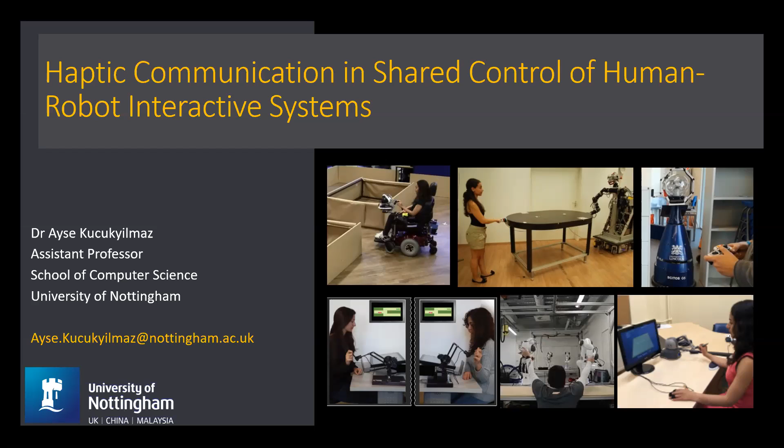Thank you, Mario. It's very nice to join this seminar series. So as Mario has introduced me, my name is Ayse Kucukyilmaz. It's a very hard surname. And as he has introduced, I'm an assistant professor in the School of Computer Science at the University of Nottingham. Today I am going to talk to you about a general overview of my research enabling haptic shared control systems while interfacing humans and robots. I will start my talk with a little introduction of myself.

So I started my robotics journey in 2007 when I was a PhD student at Koç University. By then I was mainly working with haptic interfaces, which are these small robotic arms which allow you to feel forces that you can render on a typically virtual scene. We were actually working on mostly simulated worlds, virtual worlds, and looking at how humans can interact with computer agents.

In 2010, I visited the Technical University of Munich, and that was my first interaction with real robots, where we integrated mechanisms that we implemented for human-computer interaction on a real man-sized mobile robot. The idea that we had during my PhD and at the Technical University of Munich was focused on the role distributions between two agents.

So how should a robotic agent assist a person, not by only acting like a follower, but acting more like a proactive entity that is like a peer to the human. During these studies, we focused on understanding how we allocate these roles dynamically, how the human and the robot should exchange their control over the task, by introducing haptic negotiation mechanisms, which look at the forces that are applied on a task and how they can be used to change the dominance behaviors of agents.

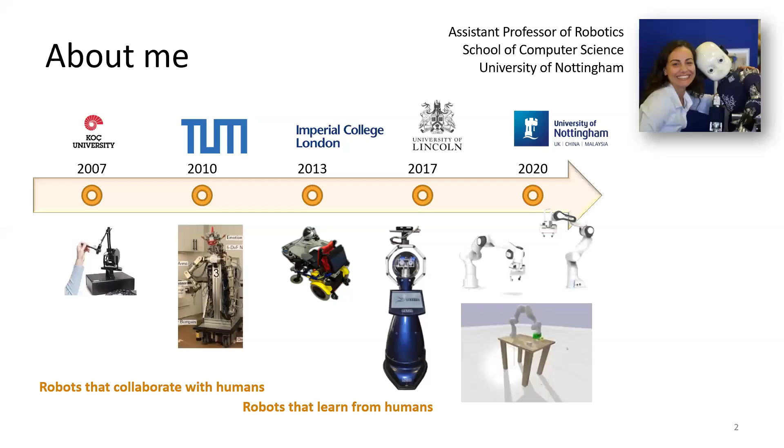So during my journey and my research, I have been initially working with robots that are only collaborating with humans, and then I moved to more learning methodologies. I'm currently also focusing on robots that learn from humans, and the ultimate aim of my research is to enable robots to complement humans.

So this can be a short summary of all my research interests. Unlike many people in the robotics domain, I don't really try to make these robots fully autonomous, but I try to make them work better with us.

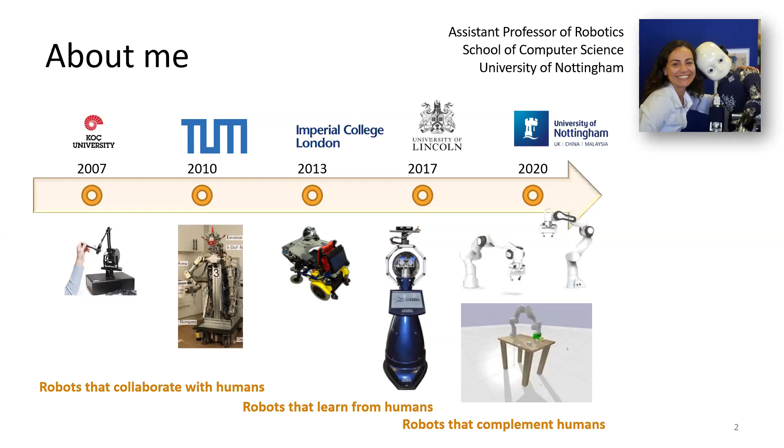So I try to find ways to get the best of both worlds, get the powers of the human and the robot together to come up with better symbiotic structures. As I say, the topics of my research can be summarized within using these keywords maybe.

I work on adaptive haptic shared control. I try to come up with systems that implement shared control, and what this means I will explain in a moment. I tend to rely on the haptic modality, which is about the sense of touch, or more about the forces that we use while interacting within physical interaction. So I build haptic guidance mechanisms, I build dynamic role allocation mechanisms, and in doing so, I make use of machine learning and look at how we can learn skills from the human, or how we can understand interaction states while two agents, humans or robots, are interacting together.

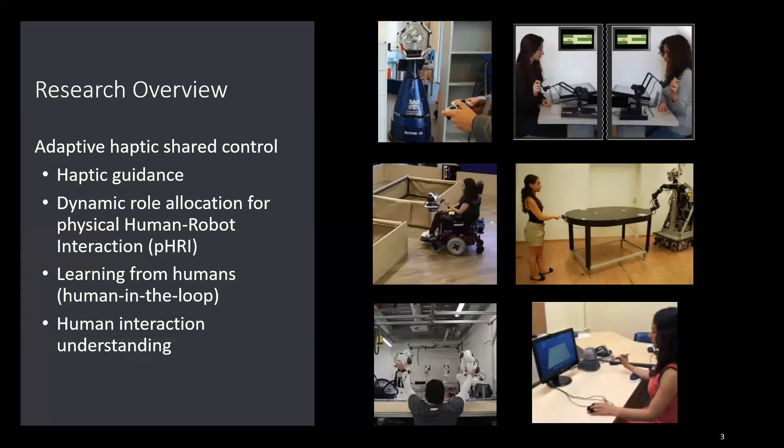And as you know, many robotics talks, I think, start very similarly. I will do the same, and I will talk about a contrast between the industrial robots and the robots that we have at the moment.

In the industrial domain, in more old-fashioned robotics if I may say, the purpose of robotics is typically automation. So we create robots to give them boring or repetitive jobs that people don't want to do, or we give them some jobs that are not really safe for the humans, so that we eliminate these risky or dangerous situations. And typically the industrial robots, or any robot that you see in a hazardous environment, are very big. They are really very strong and big robots that can work at very high speeds, but they are designed to work in typically isolation from humans.

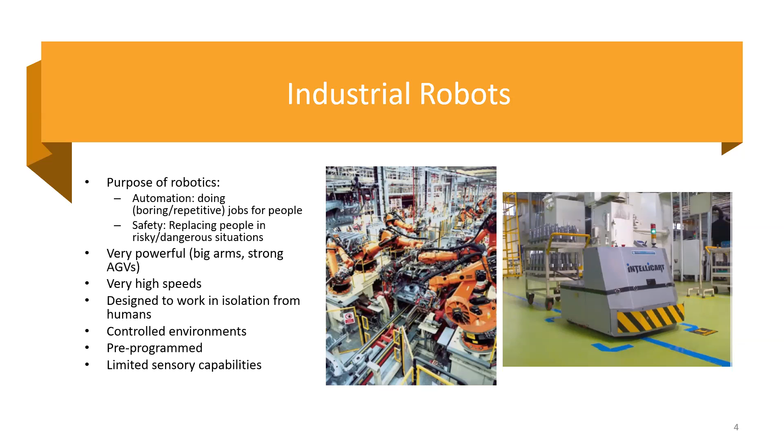So you wouldn't typically see a human hanging around and changing the environment, and you don't really see the environment changing too much. So everything that the robot does is pretty much hard-coded. And because nothing really changes, that hard coding doesn't really cause any problems while the robot is performing its task. And because of this, you don't really need to have very complex sensory capabilities, unlike as we have it with the robots that we have in more futuristic scenarios.

So today's robots, I want to maybe imagine a little bit with you, are designed, or we try to design them to work along with people. Because when developing today's robots, we try to come up with these robots that can maybe physically collaborate with humans, and this can be maybe autonomous cars which can work with you to improve your driving, so that you don't really get into a crash, or you don't actually have to get tired while driving.

Or it can be more like cobots or mobile manipulators which can carry stuff with you. They can be even those robots which could enable you to go to a museum while you're under lockdown, so that you can get onto remotely on the robot and go around the museum while driving around with other robots maybe, or other people.

And physical rehabilitation or assistive robotics is another area that today's robots focus on, so that we physically bond the robot onto a human. So there is a very, very strong coupling with the human and the robot. And there are these robots which enable social interaction, such as social assistive robotics or robotics for mental health. And these kinds of robots are probably harder to implement, because they do need to interact effectively with the humans.

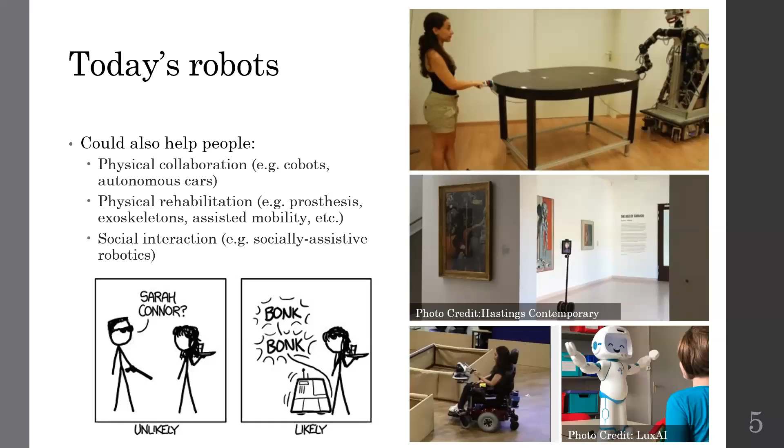And from this discussion, I want to actually tell you my opinion, or some group of people's opinion, about full autonomy. So when we think about these robots who have their autonomy and who can complete these tasks, some researchers actually think that achieving that full autonomy in unconstrained environments is not anything more than a myth. Because if you have ever worked with robots, or if you have tried to implement robots in a slightly realistic scenario even, you can see that it is really very hard to get them operate under full autonomy successfully. And in such cases, you still rely on human intervention or human decision-making capabilities.

For example, if you're in a situation where you have a robot to sort maybe dangerous materials in a nuclear reactor, you could want a human to point to you what should be placed where, or what is dangerous and what is not. These kinds of decisions are actually very hard for robots to do, whereas it's easier for us. However, robots are much more precise and faster. So they have their strengths and we have our strengths.

This is the core of all my research. Thinking about this, I want to discuss the concept of levels of autonomy. This is more prominent with the coming of autonomous cars, where they've defined 5 different levels of autonomy, ranging from teleoperation to full autonomy. This spectrum of levels of autonomy is actually consistent across all robotic applications.

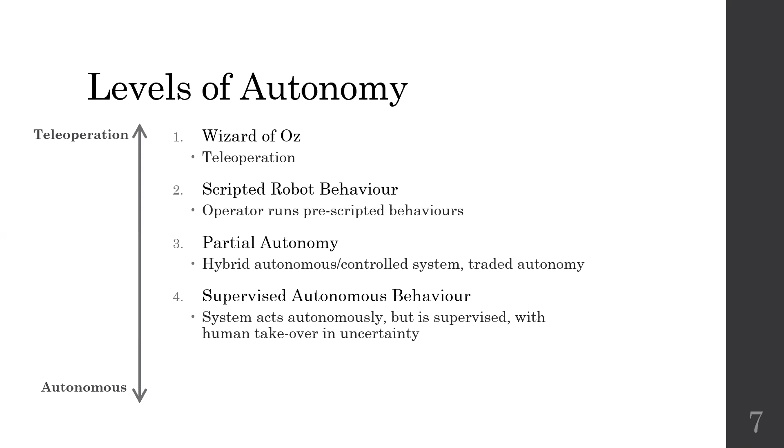Then there is supervised autonomy, similar to partial autonomy, but here you tend to go toward a more fully autonomous robot, where the system can act autonomously most of the time, but there's a supervisor. In case of dangerous situations or decision points, humans can still take over control of the task. And obviously there is full autonomy at the end of the spectrum, where the robot does not need any human intervention and can operate fully without humans, which is typically the myth I'm talking about.

In between teleoperation and autonomous operation, there are all kinds of behaviors which I'll call human in the loop, because in all of them you have a person somehow interacting with the system. In all these scenarios, what you see is this turn-taking between the human and the robot: the human tells the robot to do something and the robot performs something. This is one way to implement human in the loop.

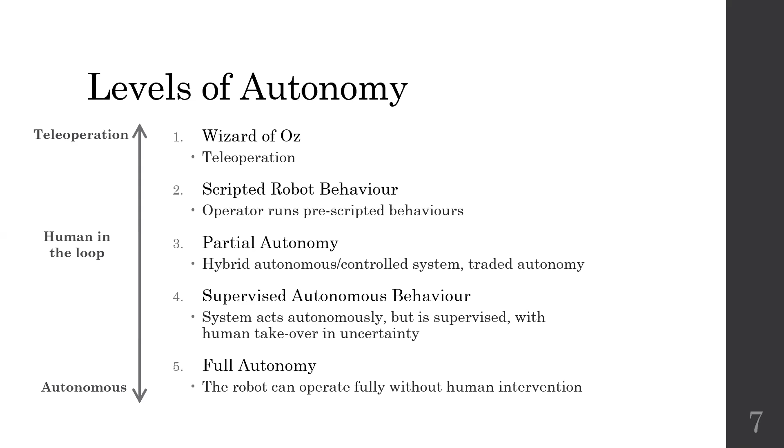We need human in the loop because automation is by definition problematic, and it has been discussed for decades. For example, Bainbridge has indicated that as tasks get more complex, as long as you demand more complex control behaviors from a robot, the more you need help from a human operator.

In Norman's problem of automation, feedback, and interaction, what he states is that you need to implement appropriate interactive systems by always assuming the existence of errors, by enabling some kind of continual feedback, and continually interacting with operators in an effective manner. And probably a quote from Murphy should be included here, saying: if you anticipate something bad to happen, it will happen when you're working with humans.

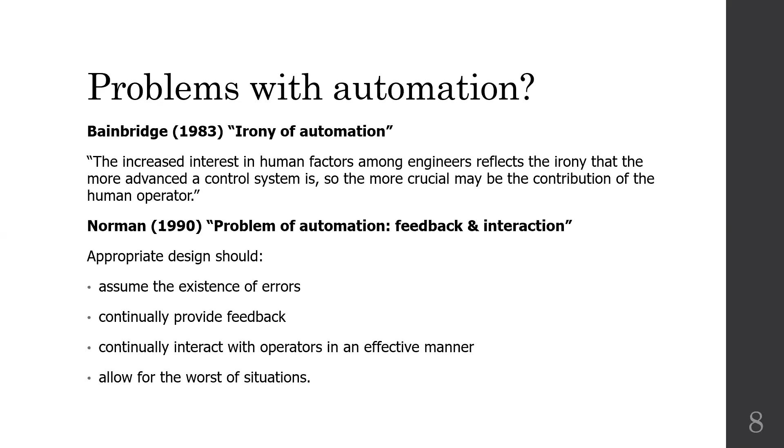These scenarios are typically very complex because the environment gets complex, because task definitions change, and so on. Because you can't really program autonomous behaviors for such things, you start putting a human in the loop, and that introduces extra problems. Because we have human errors - the human involved in the task could be the designer, so the autonomy itself can be problematic, or it can be the operator who's manipulating the robotic system to support it.

Maybe the decision making contains errors. Something else lacking in this framework is feedback. You have to provide feedback from the robotic system to the human in a continuous way, one that does not annoy the human or cause overload. In order to enable this, we need a system that is adaptive and compliant, instead of a rigid, completely formal, autonomous mechanism.

The current solution to human in the loop, using the human as an emergency system that needs to be aware of system state, failures, or capabilities at all times, is very demanding for the human. If the human has sole authority of switching the control authority, that is problematic, because the human needs to be alert at all times. In case of dangerous tasks where the human does not perceive the situation, the results could be catastrophic.

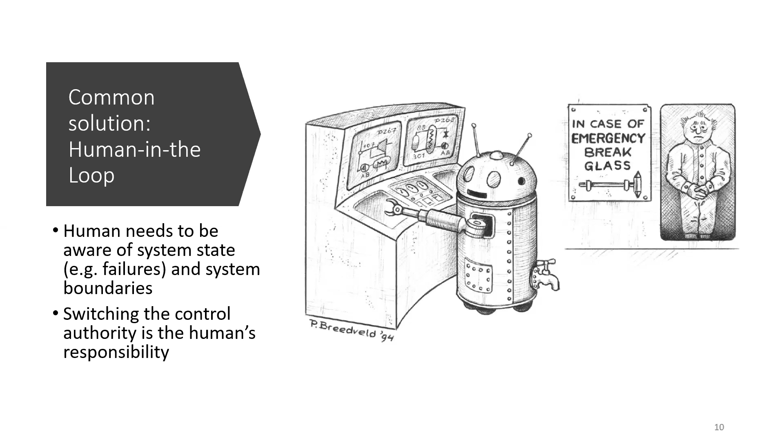I want to give an example of a traded control scenario we have implemented to show you a typical human in the loop scenario.

In these two videos, you see our robot Linda working in our lab. We used ROS move base to implement autonomous behavior for the robot. Anyone who has worked with mobile robots has possibly encountered similar situations, where you design an environment, change something slightly or set some navigation parameters, and it doesn't work correctly in all situations. Here we show two situations: first, Linda gets stuck in a corridor even though it can actually pass through it. Second, there is a node overlapping with an obstacle in the topological map, so it can't find the correct route. These situations are actually very simple for a human to solve.

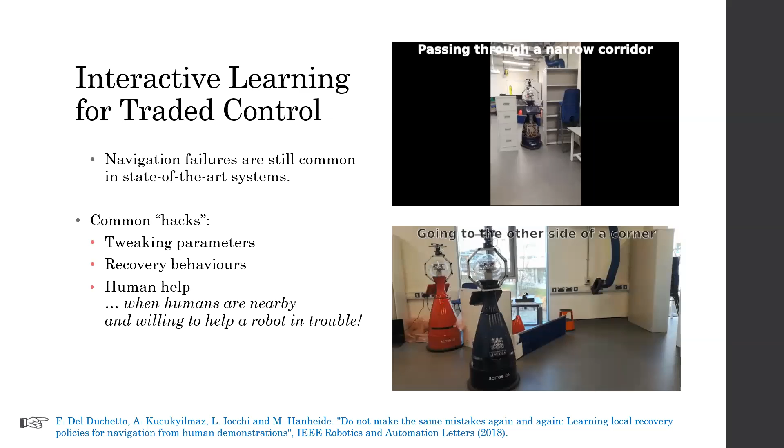Here we implement a traded control mechanism, so we have global autonomous navigation control of the robot, and we enable a human to step in. In case the robot fails, and can understand that it fails, the human could show some routes for the robot to recover from the error situation.

What we implemented is a two-layer learning framework with a failure classifier. We implemented a Gaussian process classifier to look at the laser scans of the robot, and the robot classifies the error in a certain situation, then asks the human to show it how to recover from that problem.

These recoveries are also implemented as Gaussian processes. We execute a recovery trajectory, model it using Gaussian processes, and feed it into the robot's library as a local navigation strategy, so the robot knows that in case of this kind of failure, it could step in and use that local strategy to get out of it.

This is what we came up with in the end. The robot is moved by MoveBase, and it faces a failure, and the human steps in, and the human basically shows this is a safe thing, so you can just move on, and the robot learns it.

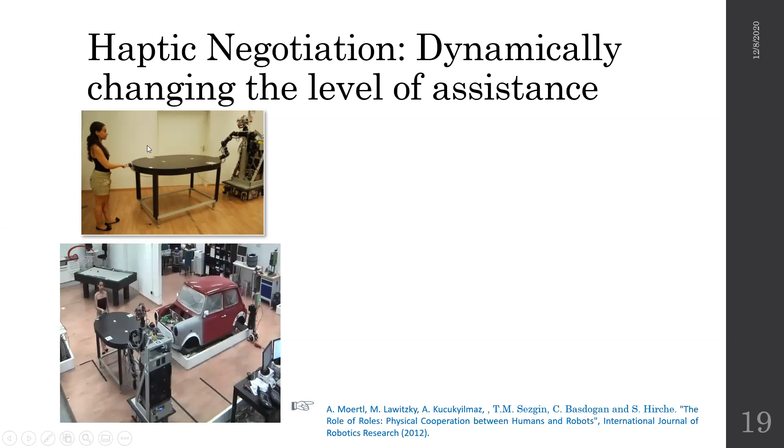In here, the robot is haptically linked to the human. There is a force sensor where the robot can actually read the forces applied to the table by the human. What we had implemented here was a really symbiotic relationship — we assumed that each agent is actually a peer, so each agent has the inverse model of the table and this impedance control in the models.

Using those models, each agent can come up with certain wrenches that should be applied on the table to move it, which consists of the plan of the agent. These are then negotiated through a dynamic role behavior to assign control levels, autonomy levels, to the human and the robot to collaboratively move this table.

We did this by integrating a role behavior negotiation block into the control scheme, so that we look at the forces applied by the human and the robot, create this role allocation setting, and assign autonomy to the human and the robot appropriately so they work more effectively. What these 2 studies showed us was that in both studies, this dynamic role allocation behavior was shown to improve task performance and reduce effort requirements of the humans.

We showed that the use of haptics, the use of these forces, can on its own allow the robot to infer the intent of the human, so you don't need to look at the motion or have cameras to understand the intentions. By only looking at the forces, you can try to understand the motion intentions of the human, and using that information the robot can change its behavior and adapt better to the needs of the human.

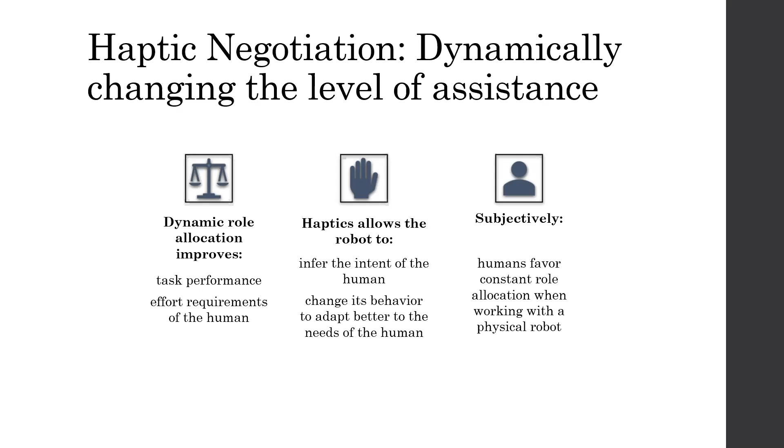However, especially in the real robot experiment, what we observed was humans still favored constant role allocation because this very proactive behavior felt very intimidating to them. That hints at some further research into this, to study what is the best way to interact with the human, and how the robot can make it clear that the decisions or actions are actually for the benefit of the human.

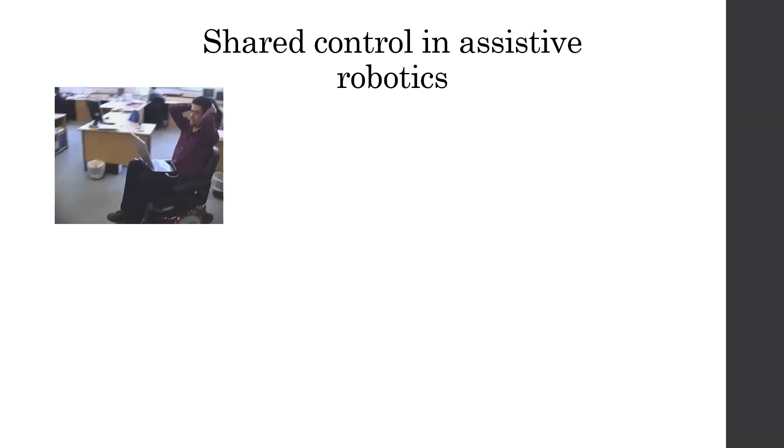On a very similar thread, I have worked in assistive robotics, and the shared control idea applied to assistive robotics is interesting because you tend to move toward building more personalized systems. These videos illustrate the assistive robotics application. We were working on this wheelchair, and here Tom, who's in UCL right now, is demonstrating a fully autonomous robot, which from an engineering perspective we thought was a very nice solution.

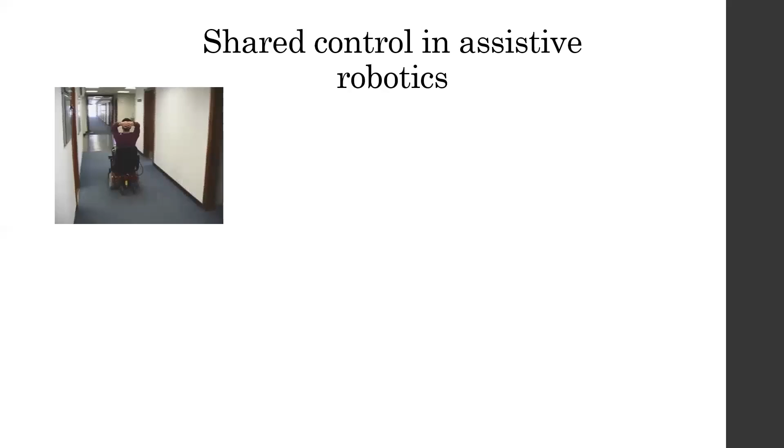However, the real users actually hated this solution, because especially wheelchair users really want to be in control. They don't want to be carried around.

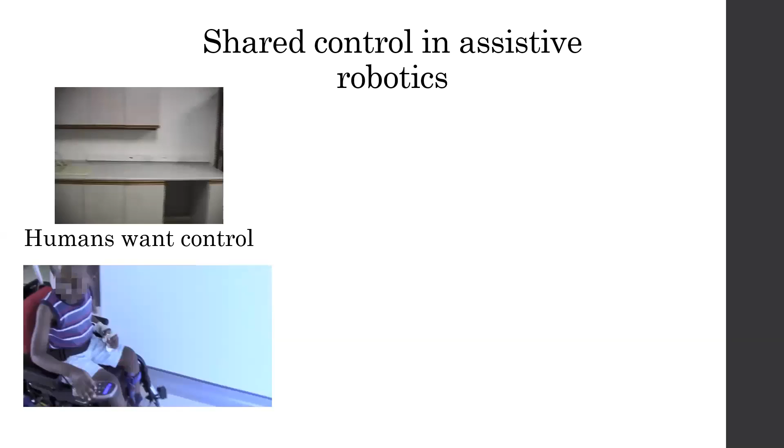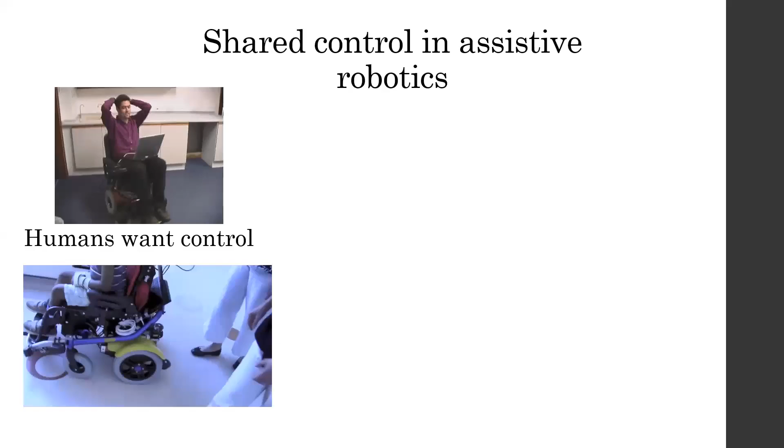On the other end of the wheelchair user spectrum, we have different kinds of users. For example, this child had a surgery, and because of the surgery he had lost his sense of fear. The NHS wouldn't give him a robotic wheelchair because he was dangerous to the environment, to himself, and so on. As a very small child, because he couldn't really move on his own, his option to cognitively develop was very, very limited.

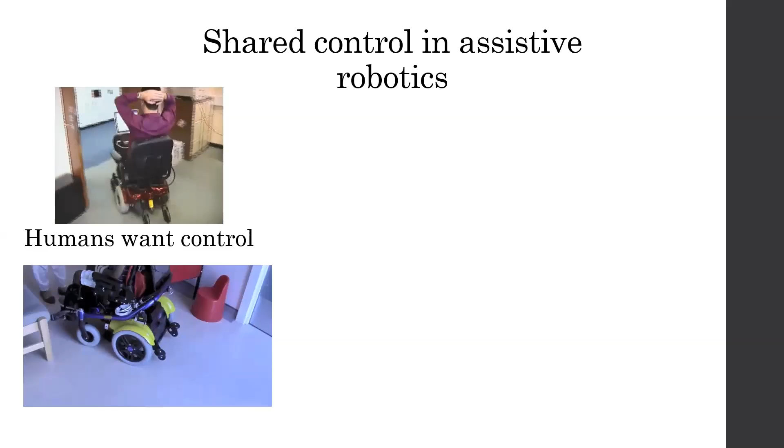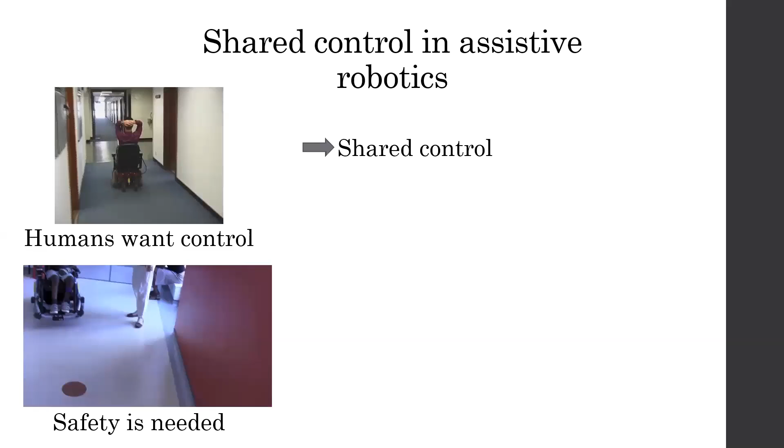In such a user scenario, what you should actually ensure is safety. This kind of different personality, different personal choice or personal need, is an open invitation for building shared control systems. The system we developed here is again a haptic shared control system, a prototype system, obviously not to be given to this child.

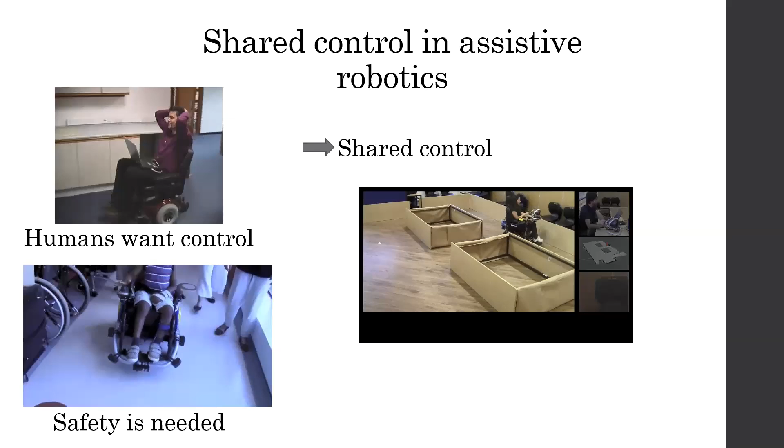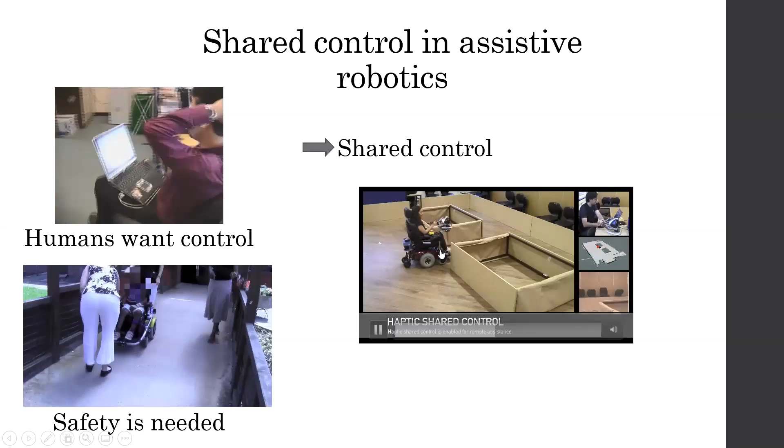What we have here is we can allow a person, or an autonomous agent, to move the wheelchair, but we can also make the human at all times capable of controlling or taking over control of the wheelchair. Initially, what you see is the robot controlled by a remote teleoperator. However, if I feel threatened, or if I feel the autonomy or the remote operator is not doing something correctly, I can hold the joystick and stop or move the wheelchair the way that I want to.

What we have implemented here is actually another regression problem. We found that a learning from demonstration approach to teach a robot good assistance policies was a nice approach in this wheelchair scenario. So what we did was we haptically linked two agents.

In a demonstration trial, the remote human is actually looking at how the human is driving around, and depending on what the human is doing — for example, he was correcting the motion here because I was driving very close to the obstacle — he's providing some assistance. After this demonstration is taken, we look at some data from the human, from the user, from the environment, from the robot, and we train a Gaussian process regression model to learn the corresponding assistance commands.

When the remote teleoperator is gone, when I'm alone and driving, the assistance is always on, and what it does is it tries to mimic what this remote operator is doing. Here there are two lines: one is my commands, and the yellow-green one is the assistance commands. It's clearly shown that the assistance is trying to turn around these corners a little bit faster than me, so that I don't get very close to hitting any of the corners. What we also showed here is the system was actually learning and really mimicking the behavior of the robot, of the remote person.

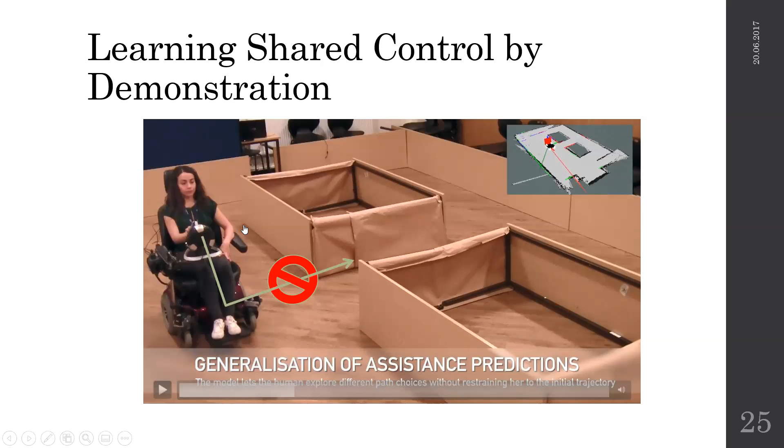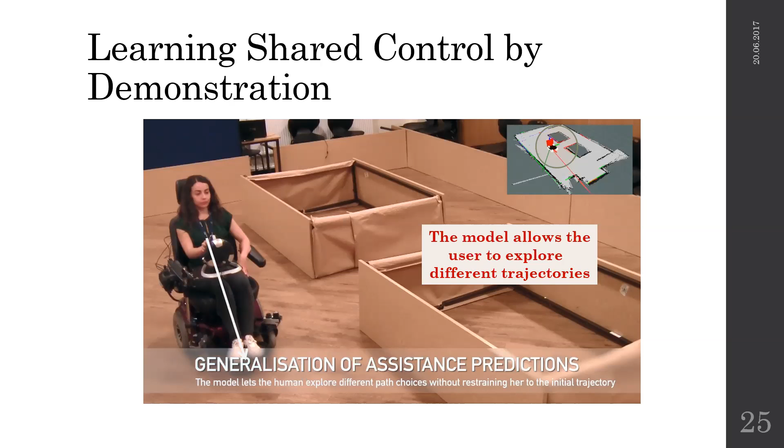However, if I take a different path than what the system was demonstrated on, for example if I choose to move forwards, the model allows the user to explore different trajectories. Here, the green line pulls me toward the open area rather than moving me to the corridor, because my haptic intention is clearly in the direction of the open area. Using these learning methodologies, you can also learn or incorporate certain policies to be applied as assistance while you're still negotiating over haptics to change autonomy behaviors.

And we have now seen certain roles for the robots. We have seen robots working as a partner, a learning partner, even robots working as an assistant, or as a team member, such as someone who carries heavy load with you. But there are also different roles for the robot. The robot can be your teacher, the robot can be your therapist, so that the task of the robot can be not strictly collaborative.

And we have been doing some work around learning from human-human interactions. We have been working on this for a few years, and we have done multiple human-human interaction studies where we collected data and published the raw data as well, if anyone is interested. What we are currently doing is mining this human-human interaction data to understand important stuff that humans are doing, especially during their motion, how they are interacting, how they are facing conflicts in motion, and how they are resolving these kinds of things.

Up to now, we have implemented certain mechanisms to do automatic recognition of skills, automatic recognition of conflicts, and interaction states, and we can do it in real time. We are at the moment looking at how we can learn controllers to define different interaction behaviors so that we can make a robot competitive as well, to maybe make it work like a rehabilitation robot. We are also implementing adaptive shared control formalisms and non-verbal communication formalisms on top of this to move this understanding onto human-robot systems.

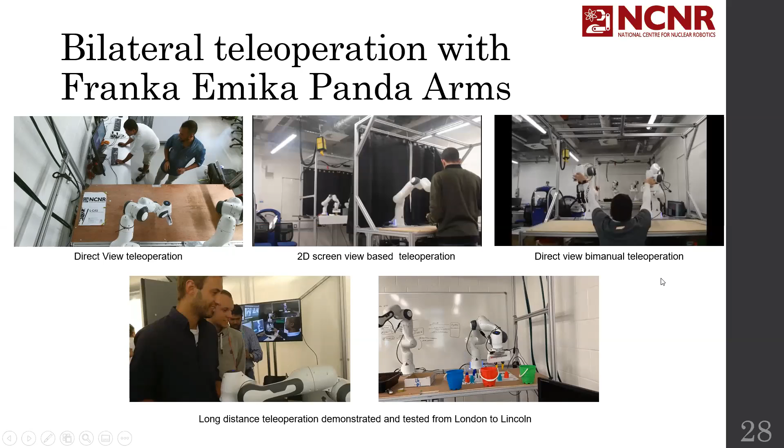So we have different ways to teleoperate robots. We have direct view teleoperation, where a person can manipulate one Franka arm to move the other one. We have this configurable space so that we can put the human far away from the manipulated slave arm, so that we can have a more realistic teleoperation scenario. And we have a system to enable bi-manual teleoperation, so that we have 2 masters controlling 2 slaves as well. And the systems have been demonstrated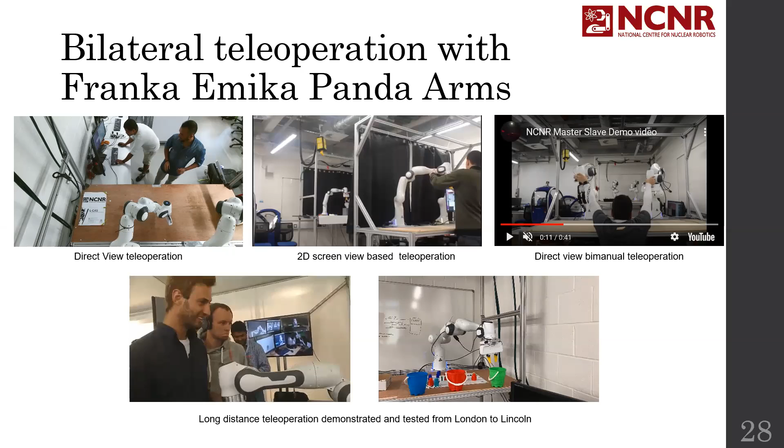Under long distance teleoperation, this was an older demonstration where the teleoperation system was used to teleoperate a robot in our lab from an event in London.

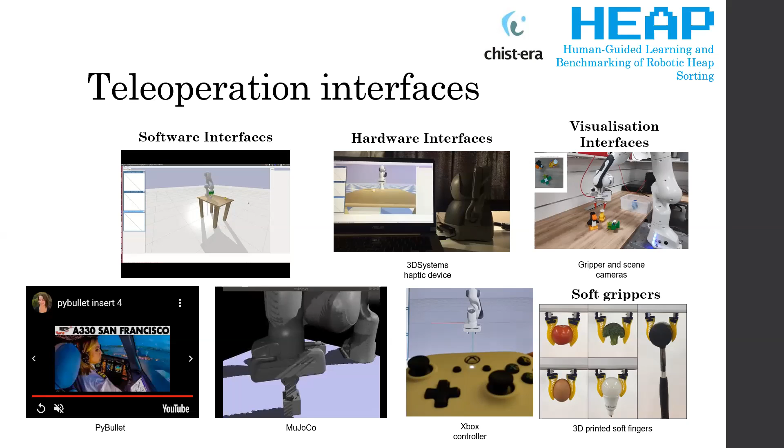Currently we have done a lot of work on developing software interfaces, especially with the coming of COVID, we started relying a lot on simulation. So we have a full-scale simulation framework for the pandas, integrating PyBullet and MuJoCo. This is part of this HEAP project, which I'm currently leading, focused on benchmarking robotic heap sorting. We are really relying on this simulation framework to look at how we can implement different algorithms, how we can benchmark these to advance the manipulation literature in robotics.

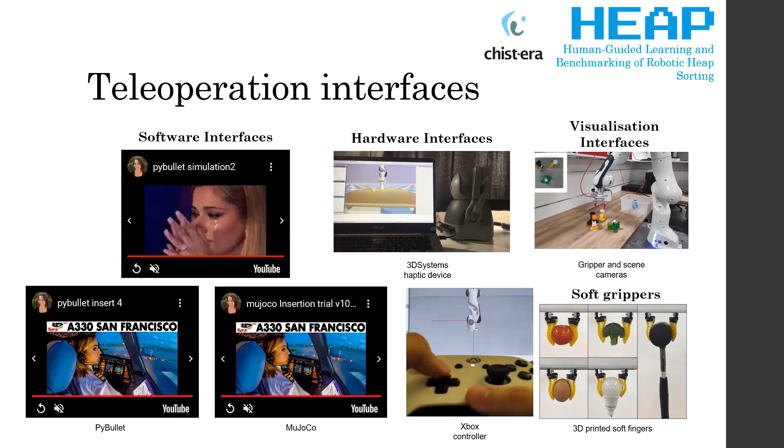Apart from the identical slave arms, we have integrated different hardware interfaces. We can move or interact with the simulated and real robots using haptic devices and a simple Xbox controller interface. We have different visualization interfaces showing different camera views of the robot and environment. One of our colleagues, Khaled Elgeneidy from Lincoln, has developed these soft grippers, and we are using his grippers to complete our manipulation tasks as well.

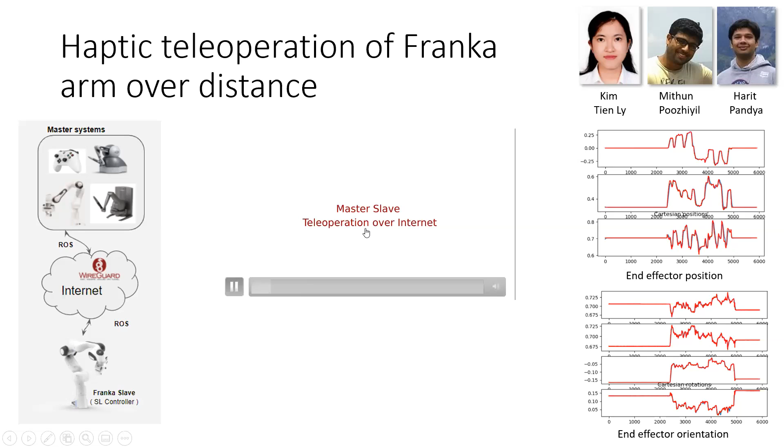One of the most recent work we have completed is the master-slave teleoperation over the internet. We have integrated the teleoperation system using a haptic device. Here, what we use is a WireGuard VPN to make the haptic device teleoperate the Franka arm from Nottingham to Lincoln, using very simple filters and using ROS.

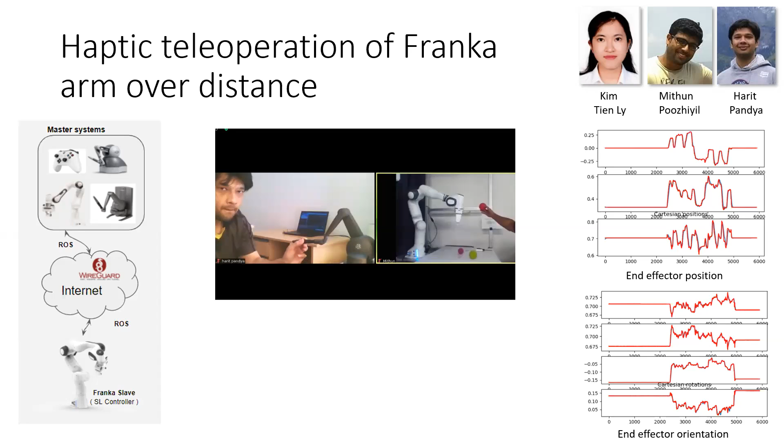And what we have seen here is we are able to really mimic the end effector position almost precisely, end effector orientation very, very well. The major difficulty we have is not on the haptic thread, but mostly on the video link, where the human needs to actually see what is going on in the scene.

Finally, this was Kim Tien Ly's master's thesis. We have implemented a shared control mechanism to guide the human to sort objects in a heap. Here, what we see is the robot trying to grasp certain objects in the scene, and the objects are actually colored. So it is the human who knows which object needs to go into which box.

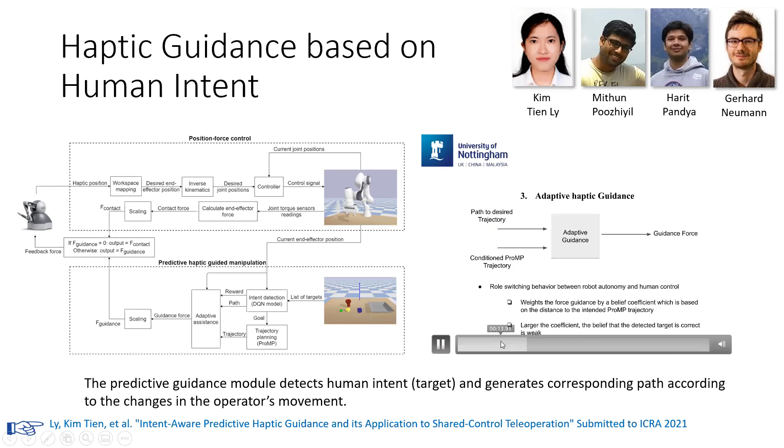Based on the distance to the objects, we learn a DQN model for human intent detection, and based on a reward computed from the distances, the robot chooses which object it should approach. These approaching trajectories are learned through demonstration. So the robot has a library of behaviors from which it chooses to approach and bin these objects.

And here, I think there is a short demonstration at the end. Okay, this is not here. But basically, what we have observed here is...

When compared with manual operation, this kind of switching behavior, by integrating the intent of the human and looking at these learned behaviors to complement the human operation, drastically improves grasping performance. So the number of grasping attempts significantly drops with this intent-aware haptic guidance paradigm.

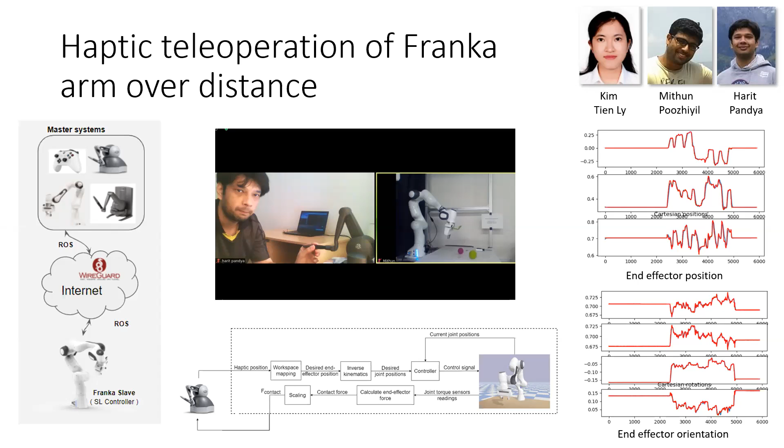So, Aisa, thank you very much for this presentation, and thank you very much also for supporting this series of events. It has been a pleasure to have your talk. It's my pleasure, thank you for calling me - it was very fun, hopefully it was useful as well. Very useful actually, thank you very much. Thank you, hope to talk very soon. I hope to see you soon. Okay, yes, bye-bye, bye.